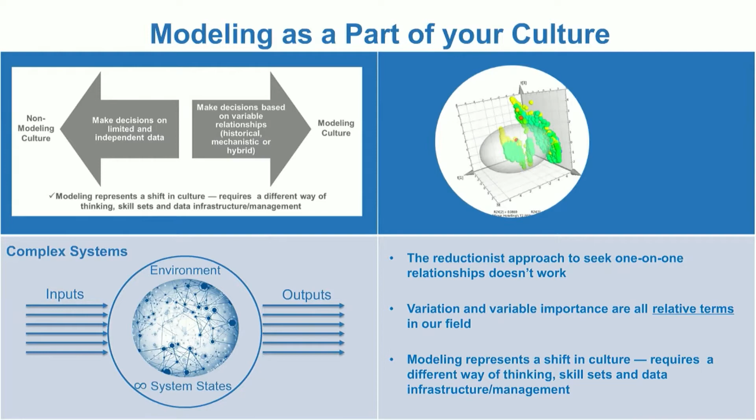So when embarking in this journey, we have to keep in mind that modeling for control is not a single task, and it is a discipline, it's a field, and it needs the appropriate skill sets and competency model. Quick data analytics and data set description is relatively easy, but to generate process models, the modeler needs to understand the process and the overarching control strategy of that product. And this will dictate the expected operational space and data variation.

Thus, building models for process control and quality decision is complex. It will require time, it will require effort and an investment, and also a cross-disciplinary team that speaks roughly the same language.

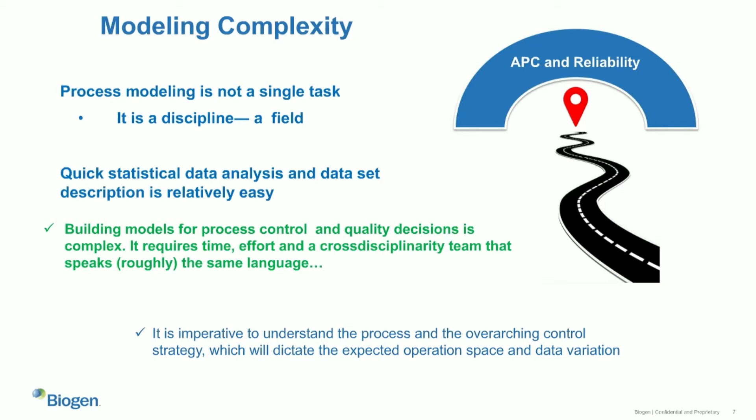These are some of the regulatory expectations or guidelines around modeling based on application, risk, and process knowledge. They all mention that for process control and quality decisions, a data-driven approach alone is not sufficient, and it could actually be risky. Thus, we have to be careful when proposing machine learning models to control processes without backing up the variables and model structure with causalities or first principles.

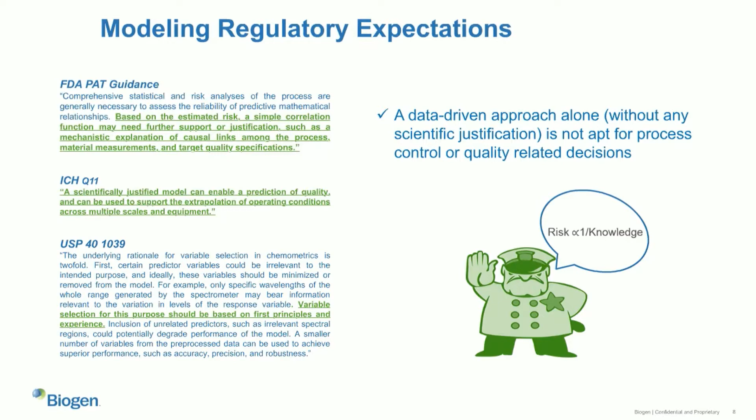As an example, the PAT guidance states that based on the estimated risk, and this will be related to model impact, and I'll talk about model impact later, a simple correlation function may need further support or justification, such as mechanistic explanation of causal links among the process, material measurements, and target quality specification. And the reasons for these regulatory requirements is that the risk is inversely proportional to knowledge, and that pharma has traditionally operated below 3 sigma levels.

So according to ICH Q8, Q9, and Q10 questions and answers documents, models can be categorized in multiple ways for the purpose of regulatory submissions. Their category will depend on their contribution to assure the quality of the product. In this particular model, low-impact models is referred when a model inadequacy cannot directly lead to a batch failure. A medium-impact model is when a model inadequacy or malfunction may lead to a batch failure, but other tests or controls are in place. So there's no impact to the patient, and the product will not be placed in the market.

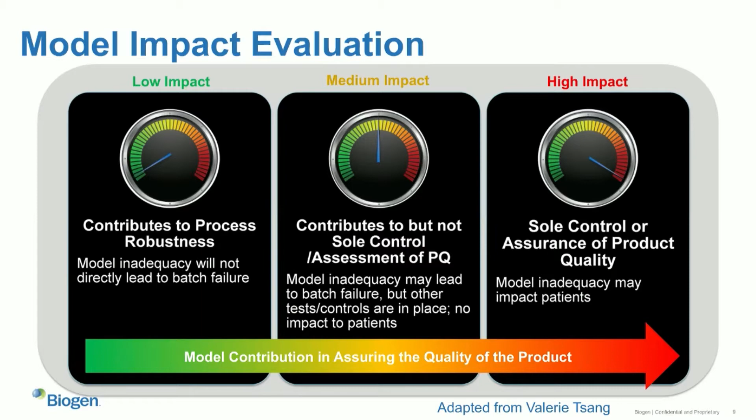A high-impact model is when a model inadequacy may impact patients. So you can see here that the strictness of model validation and overall management will have to depend on its category.

Before discussing our modeling evolution approach, I want to norm on some of the definitions that we are using for advanced process control to avoid confusion. At Biogen, we have adopted automation engineering APC terminology, where we are defining APC as model-based process control plus fault detection and classification. And this is the same definition used by other high-tech industries, such as semiconductors. Language alignment in the company was an imperative for us too, in order to align expectations within the company and also to learn from other industries which are more mature than we are.

In this definition, both model-based process control and the fault detection components will utilize a series of models that will serve different purposes and will represent different levels of operational spaces, from the normal operation region to the knowledge space. And that is why APC is so tightly related to modeling.

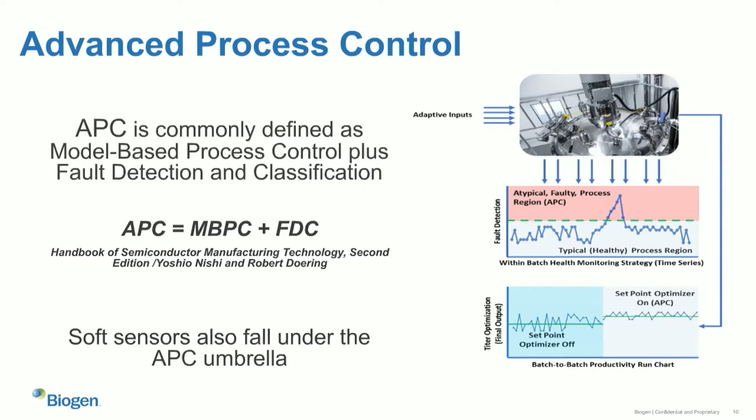So what is a fault? A fault is defined as a change in the variation of a system away from common noise. The easiest way of using models for multivariate fault detection is by employing unsupervised models that represent good operational spaces. And these spaces are analogous to your proven acceptable ranges. The automation mechanism is done through process condition monitoring, where you monitor your process in real time and determine when the process is out of univariate or multivariate statistical control. And here we have an example using bilinear modeling.

You can also develop soft sensors to generate supervised fault detection strategies that link the health of the state and the state of the process to its final outcome or output. Soft sensors are models as well, and they are used to estimate unmeasured or unmeasurable process outputs or outcomes. They can use machine learning or they can use fundamental models.

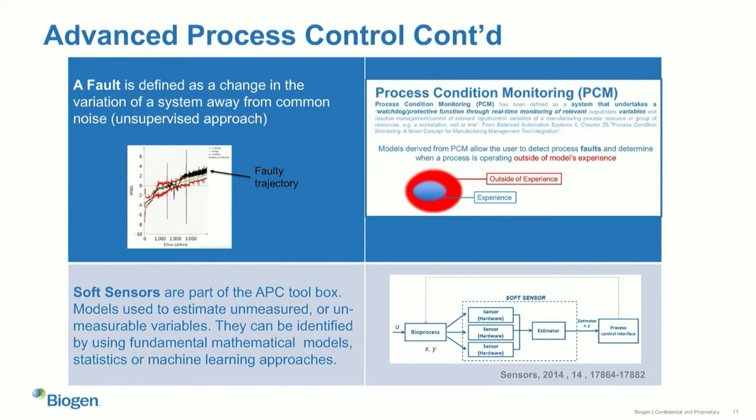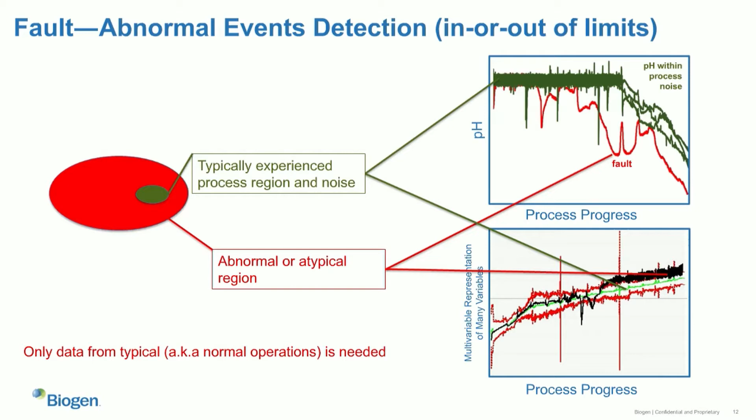This slide here is just to depict how a fault will look like from a univariate and multivariate perspective. The green traces in the top right graph show typical pH trajectories, and the red trace is a faulty trajectory. The black trace in the bottom right graph shows a batch evolving outside of common process noise in a multivariate space. And the green trace in the multivariate fault detection is a typical multivariate trajectory.

For data-derived sensors, you may need more data or information from the process than just the typical operating region. This information will be needed to expand the outcome or output range enough so that we can actually identify a model.

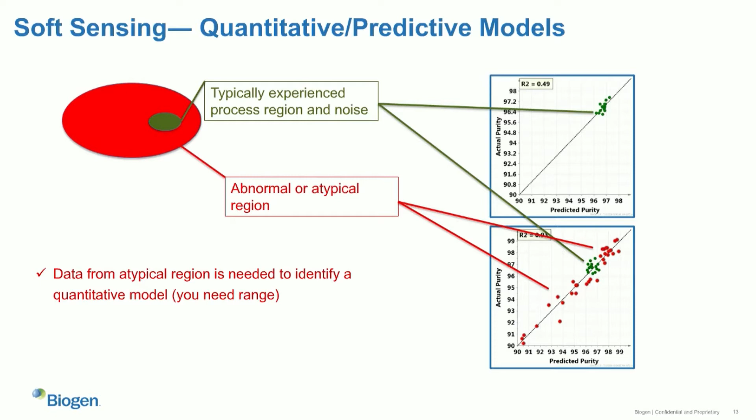The last holy grail of APC is model-based process control, where instead of controlling the process to hard set points, you adjust your process set points depending on your process state and optimization functional. For this, you will need to have a forecasting model that gives you an idea of your future process outcome or output if you keep on manufacturing in the same fashion.

Model-based process control has been described as a chess match between the process condition and the controller in an attempt to improve the outcome of the process within process constraints. Model-based process control enables self-optimization, embedding true intelligence into the process.

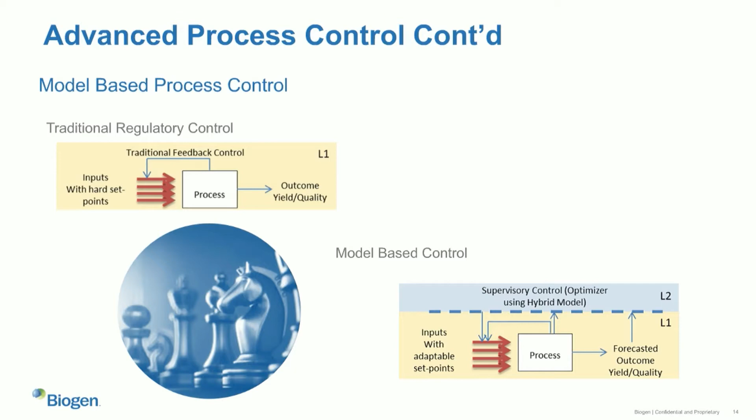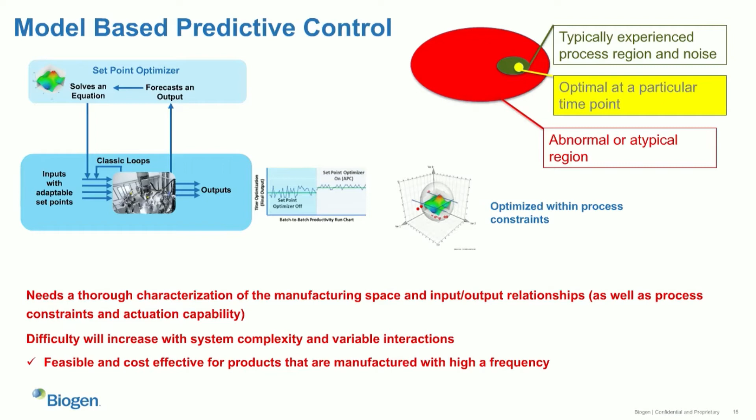In order to build a model predictive controller, we will need a thorough characterization of the manufacturing space and input-output relationship, as well as process constraints and actuation capability. The difficulty of a model-based process control strategy will increase with system complexity and variable interactions. Model-based process controls tend to be only cost-effective for products that are manufactured with high frequency.

And where do advanced control strategies reside within our automation architecture? They will reside in the second layer of the ISA-95 standard, which is a supervisory layer connected all the way to the HMI.

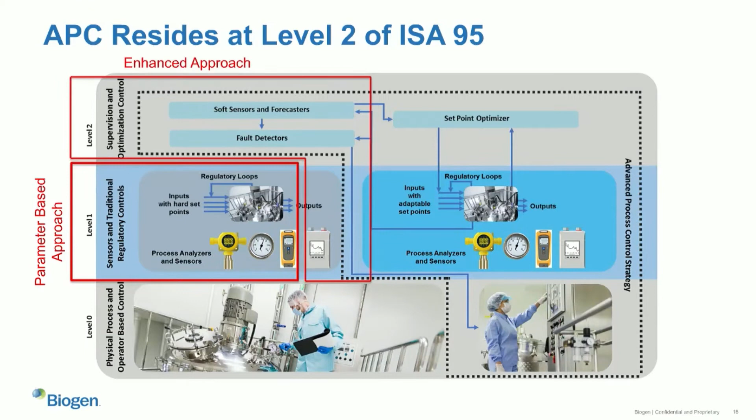In ICH Q12 terms, simple feedback control strategies will reside in level 1 and will enable parameter-based control approaches, where more intelligent strategies will be called enhanced or performance-based approaches and will be in level 2. Your level 2 strategies will have fault detectors, soft sensors, forecasters, and optimizers.

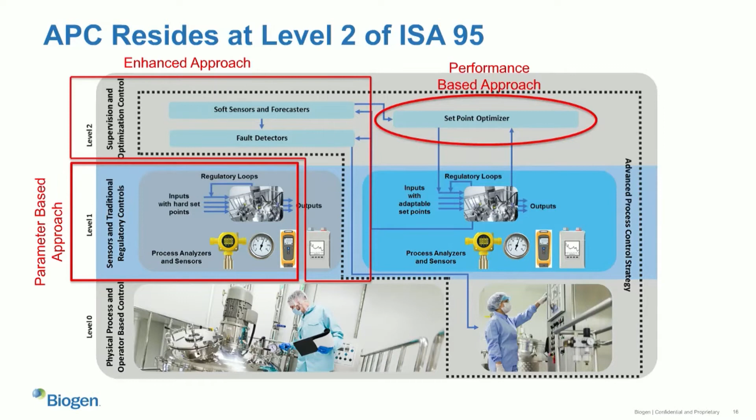This is a very simple modeling for APC maturity map, where we have listed all the control strategies that we can employ depending on the level of available data or scientific knowledge. On the first layer of our map, we have our fault detection strategies that tell us if we are within or outside statistical control or predetermined conditions. This layer also helps us to determine if we can trust our advanced control directives or if we should override the system.

The second layer is our soft sensors. These strategies will help to estimate process variables or outcomes based on initial conditions or other state variables. In the third layer, we have fault classification strategies, where a library of faults or expert systems are used to classify the nature of the faults and assign possible root causes in support of process recovery. The fourth layer is our real-time process optimizer that will prescribe new set points into our control system to improve the chances of optimal outcome.

The higher the level of intelligence in our control strategy, the higher the level of required process understanding and modeling complexity. Thus, the level of effort and investment needs to justify the cost of the development and ownership. This maturity map is very similar to the ones proposed by companies supporting and adopting big data solutions as well as semiconductor automation practices.

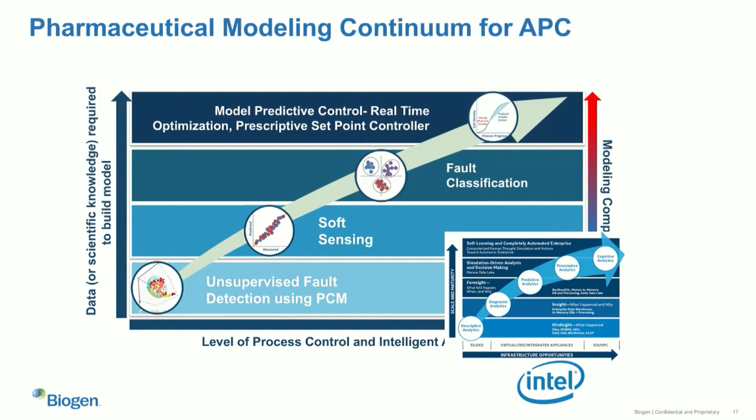Different modeling approaches are used to characterize or control the process, from fault detection to optimizers, as we already mentioned. At Biogen, system or process complexity and model reliability are being leveraged when deciding model intended use. For complex processes or processes with a high number of degrees of freedom, a strong focus is given to manufacturing consistency and supply chain reliability, and not so much to quality analysis lead time reduction, or what other folks refer as real-time release testing.

The higher the complexity of the process, the more difficult it will be to describe it using models. Here to the right, we have an example of two systems. One describes the simple solubility of crystalline material in solvent, and the other one shows some of the different equations used to describe a fed batch penicillin production. So you can see that the number of equations and terms will increase with system complexity.

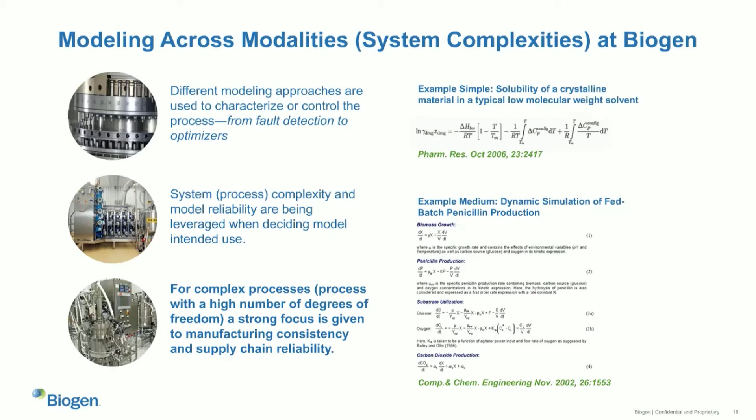Modeling activities are tied to the knowledge continuum, and just like knowledge, process models and applicability within and outside the automation architecture will evolve with time and experience. This means that intelligence embedded in a control strategy should evolve with time and knowledge. When you don't have enough data or knowledge, you can only use descriptive approaches, and you will need more regulatory oversight when proposing post-approval changes.

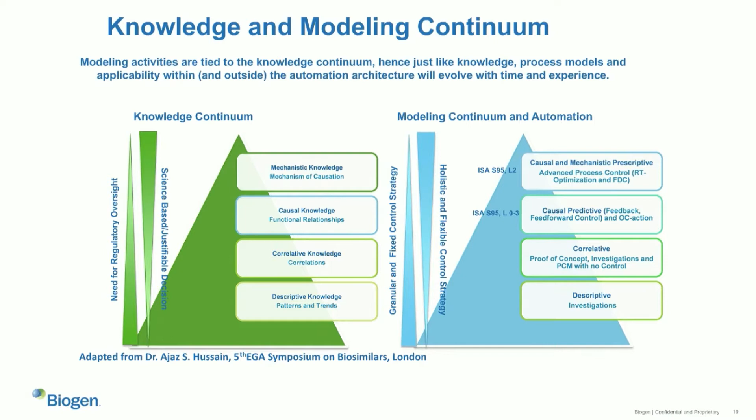As you start deriving more knowledge, your control strategy should be more optimal and flexible from a regulatory perspective. Thus, a plan for model evolution and evolutionary intended use is going to be very critical to achieve control and process intelligence.

So how can we evolve control strategies once we have filed a process? For this, we're counting on ICH Q12 guidelines, which is expected to create a regulatory path to adopt these new technologies as they evolve. ICH Q12 should enhance the management of post-approval changes and the transparency between the industry and the regulatory authorities, leading to innovation and continual improvement.

ICH Q12 contains the following tools and enablers to support a harmonized lifecycle management. Some of these are established conditions, categorization of post-approval changes, and post-approval change management and protocols. The tools that will be the most effective to support future innovations are established conditions and post-approval protocols. These two tools will provide more flexibility with regards to which process changes will need regulatory approval and how we manage control changes as we gain more understanding about the effectiveness of our initially filed control strategy.

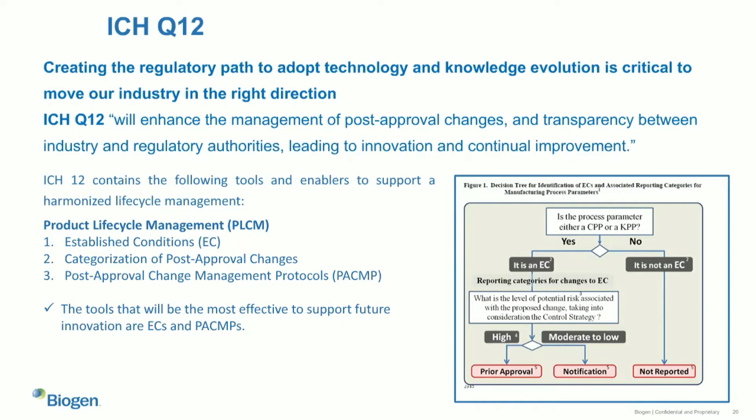So these are some closing remarks. Hopefully you have seen that data packages and knowledge used to identify or generate models are in constant evolution. And models can have very different intended uses depending on the available data package, knowledge level, and modeling strategy. The intended use will define what kind of actions can be taken based on the model results, as well as the needed level of system understanding.

Understanding the difference between complex versus simple systems and treating them differently, in other words, aligning expectation and design to the level of system complexity, is key to define intended use and business case. Our recommendation is that we strive to realize much more than quality analysis lead time reduction, because mitigating supply chain risks through visibility and disruption management brings tremendous value and can employ models that are categorized low to medium impact. Does this offer lower risk but high value?

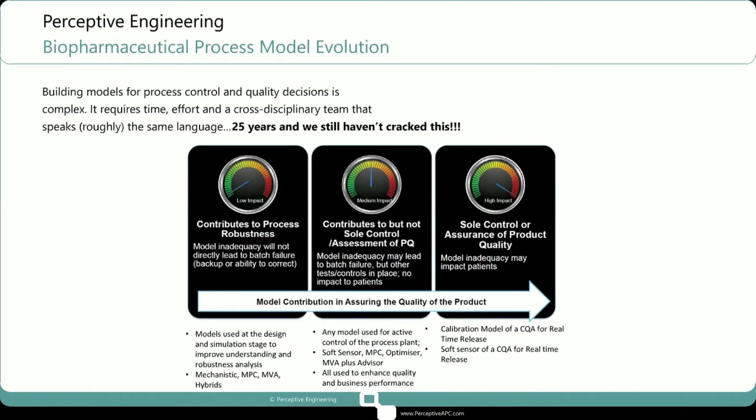But before I step into that first example, I just want to give a shout out to the ADDoPT project, which is the Advanced Digital Design of Pharmaceutical Therapeutics. It was a project that's generated lots and lots of models from mechanistic, statistical, and hybrids. And it also has included the aggregation and interpretation of big data for both the design and manufacturing of pharmaceutical therapeutics. The ADDoPT partnership primarily covered small molecule models. However, a subsequent program is starting to look at large molecule, and the ADDoPT website is a really good reference source to go to.

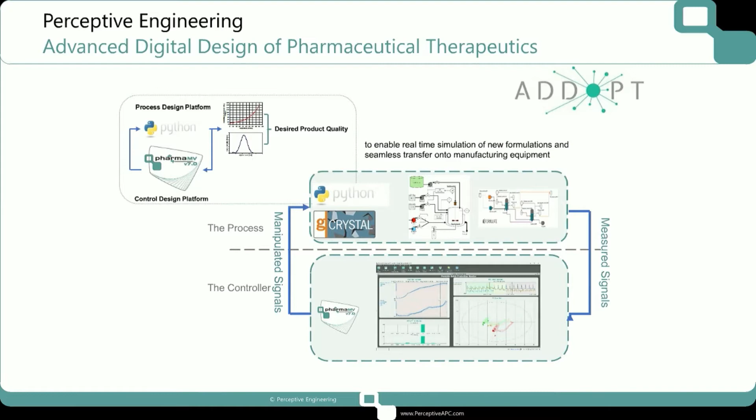So the first example concerns the ubiquitous bioreactor and the challenges of controlling and monitoring these systems. In the next 3 slides, we will show 3 model types that are used, firstly to measure, then to control, and finally monitor the behavior of the bioreactor to ensure that the yield and quality and the overall equipment effectiveness are maintained. So when we build a control and monitoring system, we try to consider the integrated aim of the controller and the monitor together.

What do I actually mean by this? So the challenge you get is if you have a closed loop control system that's doing its job well, then the process will remain on target even when it's subjected to many different disturbances. How do you actually see if something is going wrong, even when all the process values appear to be where they should be?

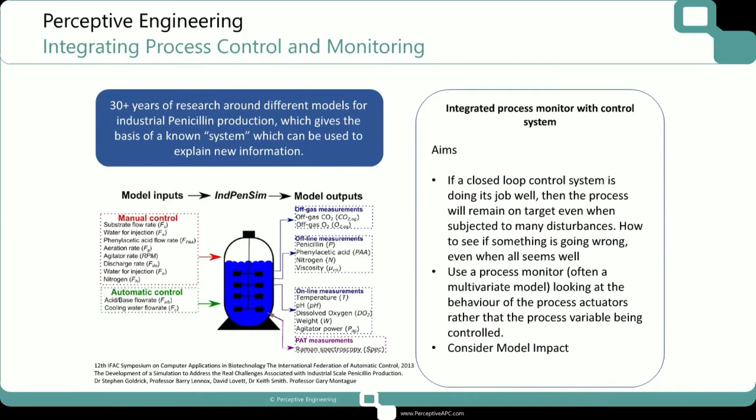So the answer is to ensure that when you develop the process monitor around the controller, and the process monitor is often a multivariate model within a fault detection system, you try to ensure that the monitor is looking at the behavior of the actuators, not only focused on the process variables that are being controlled. So are the actuator patterns consistent, and if not, why not? So let's look in a little bit more detail and consider the model impact as we look at each of these 3 models.

Firstly, the calibration model. It's developed from analytical instrument data, often spectral, and it's used to estimate the measurement of interest in engineering units. In the picture here, you've got examples of Raman and NIR spectra used to determine biomass growth and penicillin concentration. In this example, the calibration models are developed using chemometric methods to give estimates with their associated uncertainty limits.

These measurements are used in real time within the control system to maintain the desired biomass growth and penicillin yield. Typically, they are considered to be medium impact models, which means they are used to directly affect the growth and the yield within the control system. They are actually measuring those parameters. So if a model and any of the associated pre-processing is wrong, the control system will be using wrong information. But only if the measurement is actually used for real-time release would it be a critical high-impact model. Otherwise, it would be considered a medium-impact model.

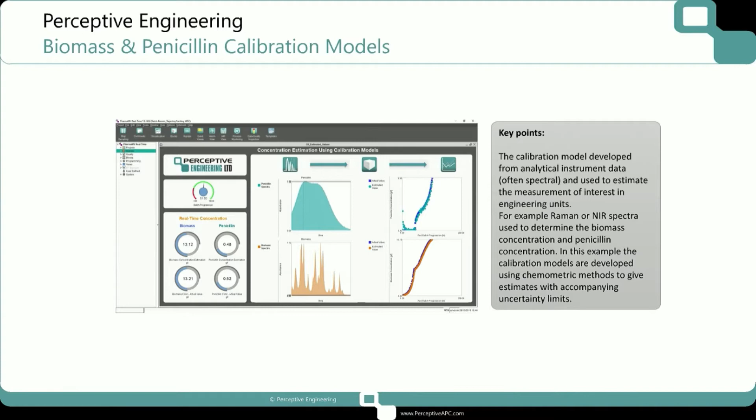So, secondly, now consider a control model. The control model is often embedded within the control system. The model is often an input-output time series incremental model. There's a lot of words there, but those are the kind of models we use, and they allow the control system to rapidly investigate different control actions and determine the future effect of making those control actions.

All the adjustments that are made by the control system can be, and usually are, limited by the setup of the controller. In this example, the objective of the controller is to do whatever it can do, but also whatever it is allowed to do, to keep the biomass growth and subsequent penicillin concentration at the desired target profile values through the batch. This kind of set point tracking model predictive control system ensures that the error from target is minimized all the way through the duration of the batch.

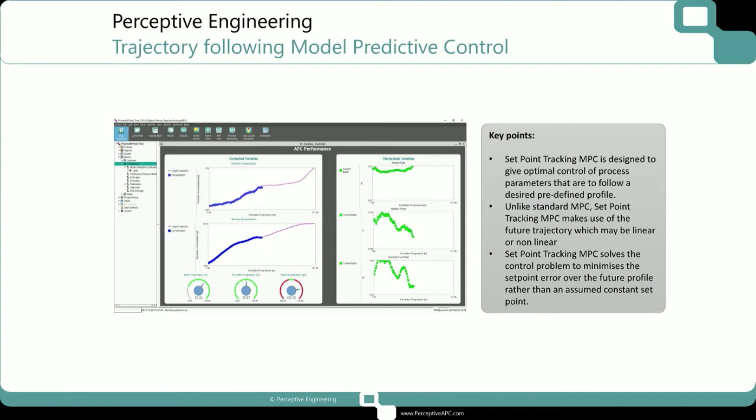Again, in terms of model impact, the model is used in real time to control the batch for optimal business benefits. It's classified as a medium impact model. And it's always worth pointing out, if you are doing advanced process control and you're using models to improve performance of the system, it makes sense to automatically calculate the benefits associated with that whole system.

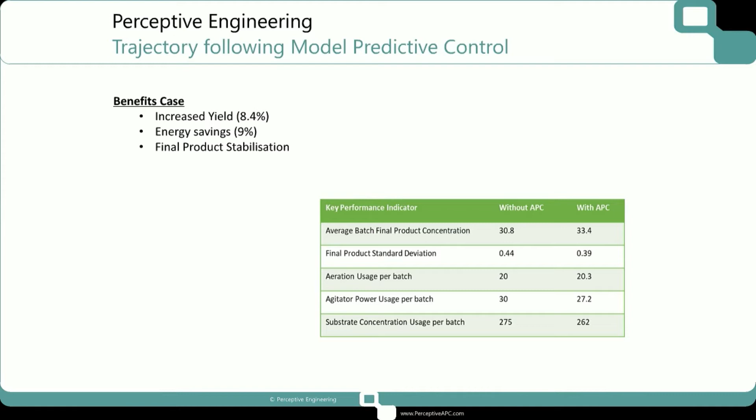One comment I'd make is be very critical of cherry-picking best results when you're making comparisons between systems. A good model and control system should be used when the process problem warrants it. Or if you want to have a greater understanding of the process or detect abnormal events, then you can use these kinds of models. You have to question when a model is to be used and whether it is appropriate to go to that depth.

So thirdly, and the final of the three models, let's look at this example of a model being used to monitor. Many biopharmaceutical companies now rely on multivariate data analysis to help efficiently monitor the broad range of process measurements, mainly to provide fast and reliable detection of process faults.

However, the multivariate monitor identifies unusual conditions within the process. So the monitor is working and looking at the control system and the process, and it's able to detect substrate feed composition changes and pH sensor drift.

Now, both these issues would be a reason to inspect more carefully the final batch critical quality attributes when the batch is finished. So it's not patient impact, but it is an operational and business impact that will be achieved through a timely intervention. So again, these become medium impact models. It's used in real-time operation of the process plant, and it'll help to improve the overall equipment effectiveness.

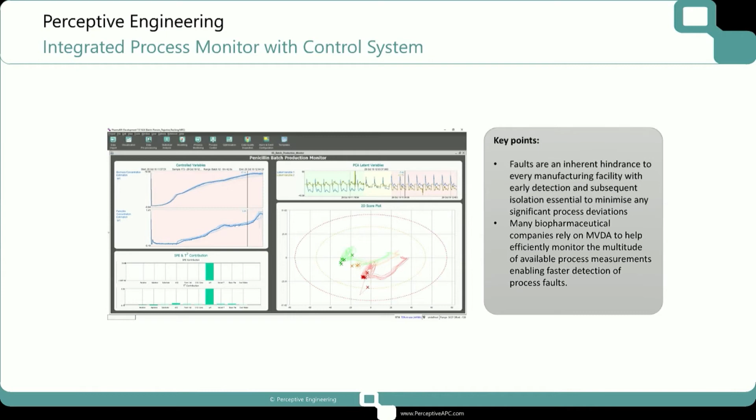Okay, so finally, we've talked a lot about models. Now, where do all these models live and interact? So Perceptive have developed a platform, and it's really to create a home for all the models.

Within the platform, every model is verified, it's checked in, it's tracked, and it's monitored either on-site or via a cloud-based remote monitoring system to ensure model integrity and complete traceability.

So I've just covered really a first look at model types, three types, and an application within biopharmaceutical manufacturing, hopefully highlighting some of the practical aspects and also linking it to the developing terminology for these systems. Let's now look at how models are used during product development.

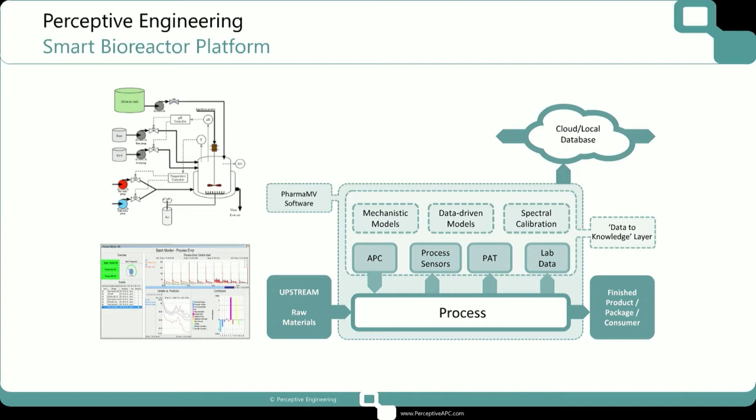So yes, as David mentioned, we'd like to cover in this part our optimized experimental design platform, which is essentially a suite of capabilities for data-driven techniques for control, monitoring, and optimization, and using these data-driven techniques to actually optimize the process, to gain greater understanding during process development, and then potentially taking those models and transferring them into routine manufacturing as we go through the process development phase.

So if we have a look at the optimized experimental design platform, this is a capability built upon the PharmaMV real-time system. And it's essentially we're bringing together the tools for Pharma 4.0 combined with the tools for advanced process control, machine learning, and using those models to understand the process, to model the process, and then to optimize the process through advanced process control and optimization.

So if we look at it, we're combining both statistical and mechanistic models for process simulation, as we'd call the digital twin in Industry 4.0 terminology. And then we're using data fusion, so we're time aligning PAT and process data. Metadata is correctly tagged and time aligned with the process data.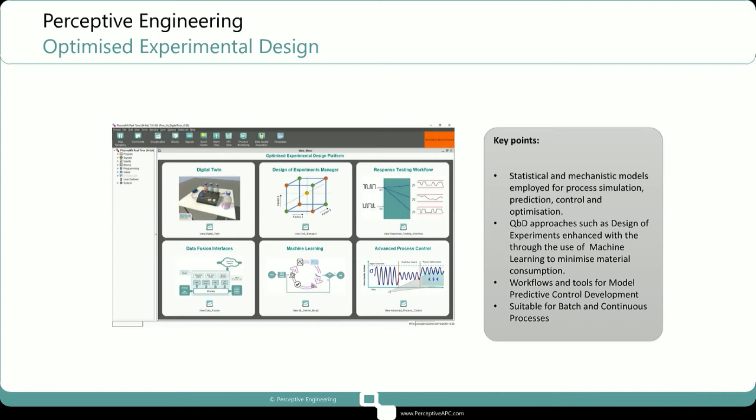So let's move on and look at the functionality of the online model adaptation, the model learning tools, and how we would actually develop those for a predictive control strategy.

A process response test is actually quite different to a design of experiments test, primarily because the results from a DOE are not well suited for extracting the dynamics of a process. We need to understand the dynamics, the residence time distributions, the time delays, the lags. The model needs to capture those responses for us to have robust predictive control. So we use process response tests to generate statistically rich information, which is quite different from the DOE approach, where we're looking to explore the operational space of the process.

So when we're running a response test, we're actually changing the inputs of the process simultaneously in a pseudo-random fashion. This can be used to generate statistically rich information because the input changes will converge towards white noise and they're completely independent.

Now, what we can actually do with model predictive control is run a model adaptation. So as we're running the tests, we can adapt our model, update our model, and this can be used as part of a model maintenance activity. Rather than modeling offline once the test is complete, we can build our model in real time as new data comes into the system.